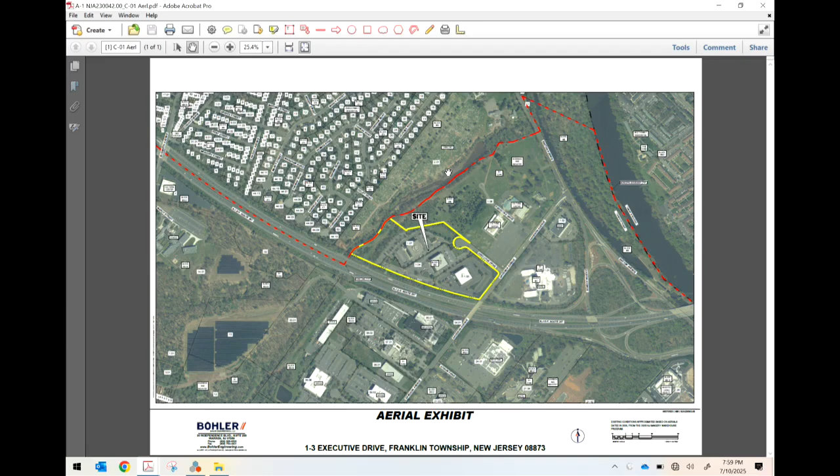As Mr. Conciatori had noted in his introduction, the site is identified on the tax map as block 469, lots 1.03, 1.04, 1.05, sorry, 1.07. I'm sure the board is familiar with the site, but just very quickly for edification, Davidson Avenue and the surrounding area. Davidson Avenue lies to the east of the site with a hotel use beyond. Executive Drive is currently to the north with a cultural center beyond. Interstate 287 is to the south with some industrial uses beyond. And there's a cemetery to the west with single-family residential beyond.

The site is approximately 18.33 acres. It's situated currently in the BI, Business and Industry Zone, where a warehouse is not a permitted use. And as Mr. Conciatori had mentioned in his opening, we understand the township's currently going through a re-examination of their master plan. There's an assessment on different intensity industrial uses, and this site would qualify in the proposed condition as a medium intensity industrial use. And with the vacation of Executive Drive, we would comply with all 10 of the conditions for that intensity industrial use.

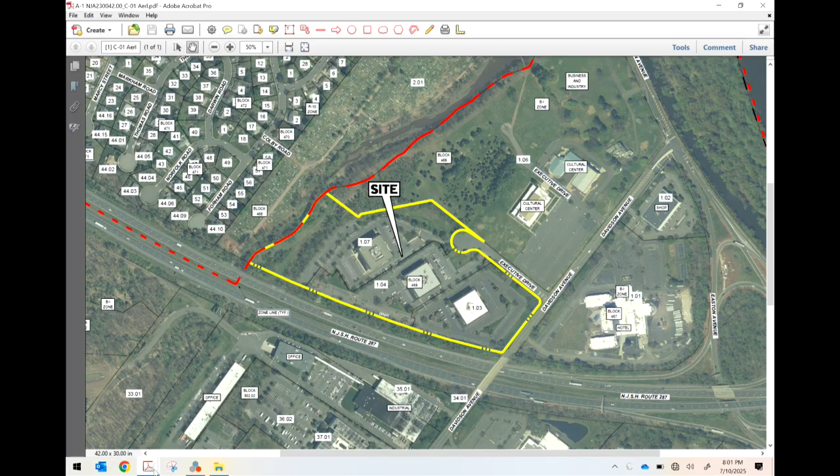So I'd like to bring up my second exhibit. We can mark this as Exhibit A2, and I'll zoom in a bit. This is a colorized version of the overall site plan sheet that was included with our submission package, sheet C301. And for the board, I'd like to go through the proposed conditions for the site. North is towards the top of the page for this exhibit, and it's dated July 10th, 2025, and again prepared by our office. The development proposes a 212,500 square foot warehouse with associated loading docks, driveways, car parking spaces, stormwater and utility infrastructure, landscaping, and lighting.

While we noted that the warehouse is not a permitted use in the zone, we are in front of this board seeking a use variance for the warehouse. From a parking perspective, we are proposing 152 car parking spaces for the site, which exceeds the minimum requirement of 93 spaces, and also exceeds the minimum requirement for the medium intensity light industrial pursuant to the master plan reexamination, which had a requirement of 119 spaces.

The parking will include 6 ADA accessible spaces, 2 of which would be van accessible per the code. And we also propose 7 electric vehicle parking spaces, which are located to the east and west sides of the car parking, which is located on the south side of the building. And the proposed EV parking and the number of those complies with the state statute as well. Within the EV parking spaces, there will also be 1 of the EV parking spaces as ADA accessible.

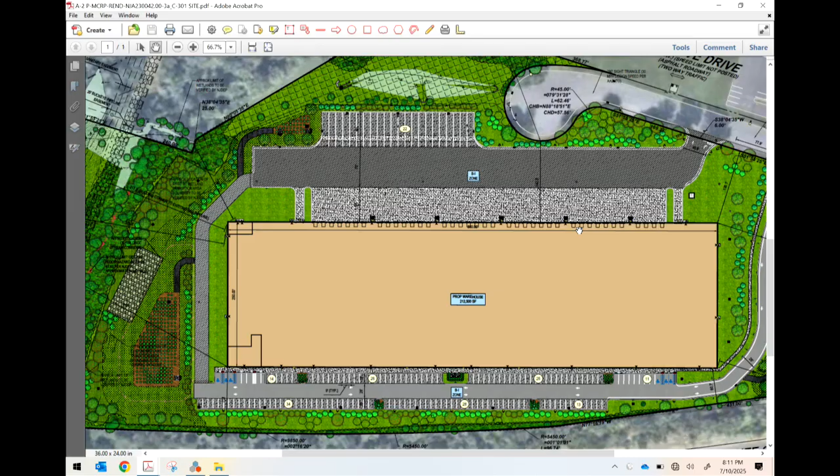There's also a code requirement for tree replacement for the trees on site that we are proposing to remove. The requirement calls for 295 trees to be replaced, and we are proposing a total of 441 trees to be replanted on site.

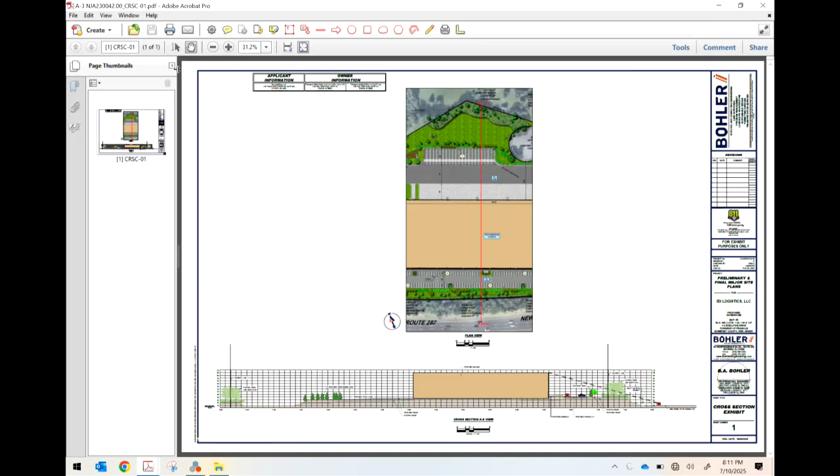Relative to screening for the site, I have a few other exhibits I'd just like to show to the board, because I think it's important for visibility for the board and to see how some of these views might look from the different areas surrounding. So I'll bring up this cross-section exhibit, and we'll mark that as Exhibit A3. This is also prepared by our office and is dated May 8th of 2025.

It's hard to see, but I'd like to zoom in on the bottom portion of this exhibit. This is more of a cross-sectional exhibit, a sightline exhibit to demonstrate what a car traveling westbound on I-287 may or may not see as they're driving by the site. So given the significant plus or minus 15-foot elevation change from 287 to the site and the existing landscaping that is already along the southern portion of the property, a car driving by will be pretty well screened from seeing the building by the existing landscaping and the grade change.

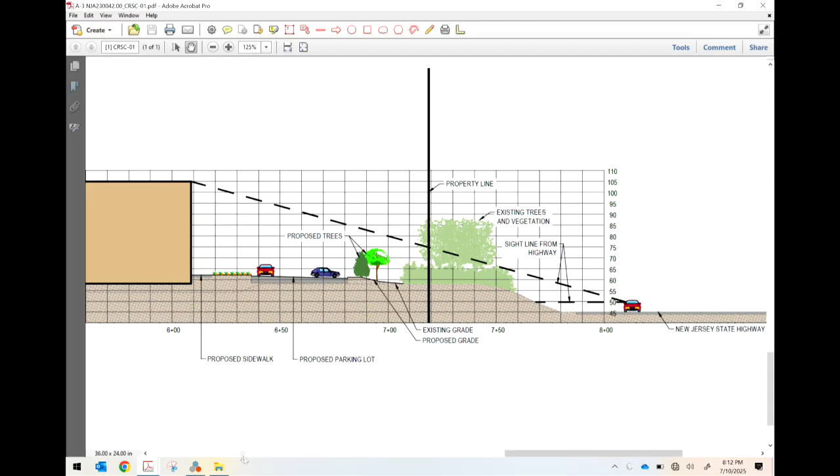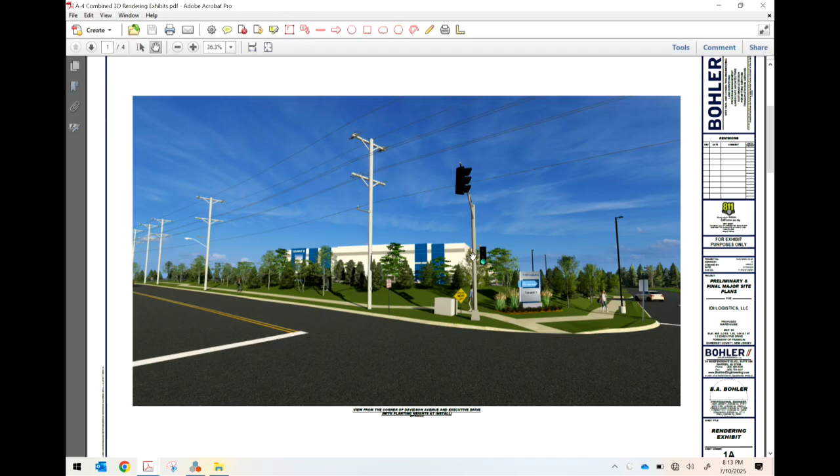And then lastly, we have a few 3D renderings as well that show some views from Davidson Avenue. This collection is 4 sheets. I'd like to mark this collection as Exhibit A4, and I'd like to just call this the 3D rendering exhibit package. So the first page of this exhibit is entitled "View from the corner of Davidson Avenue and Executive Drive with planting heights at install," and this is dated January 10th of 2025, prepared by our office. This shows the proposed plantings for the site at the time of installation for trees and screening for the building from the intersection of Executive Drive and Davidson Avenue.

And I'd like to go to the next page, which shows the plantings at a maturity height of between 5 and 10 years. So it's the same view, same intersection, same corner, but after between 5 and 10 years of growth and maturity, the trees provide a good screen and buffer to the proposed building and even the loading zone from that corner of Executive Drive and Davidson Avenue.

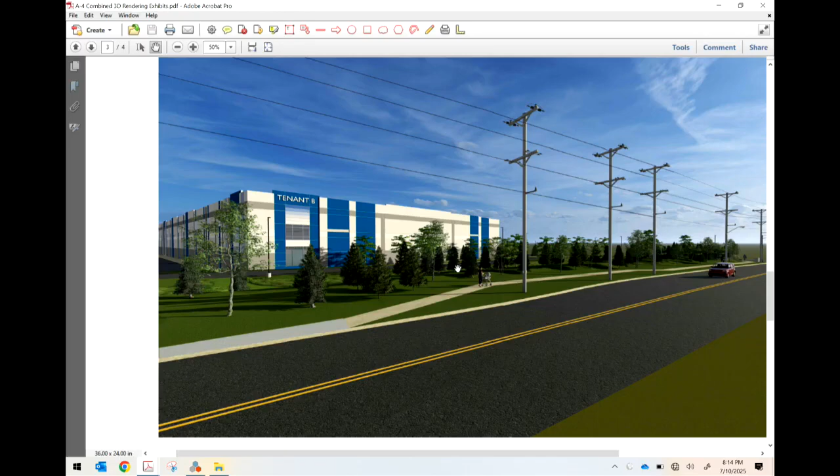And then on the next page, this is looking north from near the bridge coming over 287. This is looking north at the building. And again, this first picture here is showing the plants and the screening at the install height, so when they first get installed. And then similarly, I have the same view with the maturity height of the trees from between 5 and 10 years.

So hold on a second. How tall are the trees when they're planted with regard to the location on Executive Drive and what's the other, Davidson? Avenue? Davidson, yeah. Sure. So the install height of the trees is plus or minus 6 feet. It could be 6 to 8 feet. Okay. Relative to Davidson Avenue, I believe Davidson Avenue ranges from elevation, let's say 62 at the south side, to say 66 or 67 at the north side, and the finished floor of the building will be at elevation 62. So generally a very similar elevation, but once the trees are in and have a few years to grow and mature, for someone in a car driving by, they'll create a very nice buffer and screening from the building.

Okay, so Davidson is the east side, and then across the street from the warehouse is a hotel, is that correct? Correct. And will this screening help the hotel avoid a lot of extraneous movement and traffic from the warehouse? Will the trees that you're planning on planting? They'll block it, yes. From grade level at the hotel, with cars driving and circulating around the hotel, yes, it'll provide a good screen. And I believe the hotel does sit a little bit lower in elevation as well, which also helps. Okay. All right, thanks. Sure.

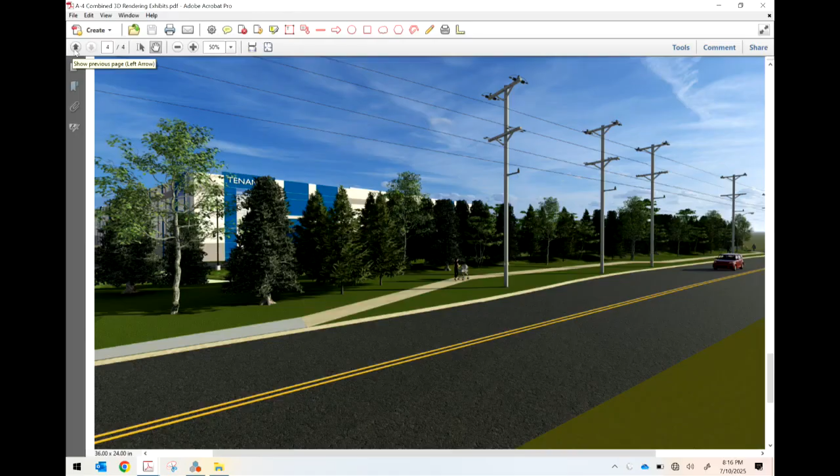I have just one question. If you can go back to the exhibit that's basically at the intersection. If you can just explain to the board, I believe that it's also showing, in addition to the landscaping, kind of a berm. Yes. Thank you, Mr. Healy. Yes, that also includes a berm along Davidson Avenue to provide extra elevation for the trees, to further help screen the building from along Davidson Avenue. It's a bit more pronounced at the intersection of Executive Drive and Davidson Avenue than it is on the south side of the site looking north. But yes, there's a proposed berm along the front of the property as well.

And that exhibit reflects the height accurately, consistent with the grading plan? That's correct, Mr. Healy. Thank you. How tall is the berm? The berm is about 4 or 5 feet, depending on where you are. Yeah.

And then I'll leave this up because I think it's a nice illustration, but just very quickly touching on some comment letters that we had received. Regarding the board engineer and the letter received from CME Associates dated June 16th of 2025, we have no objections to the comments in the letter. There is a note of a proposed disturbance within the I-287 right-of-way on the south side of the property, but there is no disturbance on the I-287 right-of-way.

We have a few trees near the property line that we are planning to remove, and graphically speaking, we show a limit of disturbance offset from the tree to kind of show that there is disturbance there, but the reality is there will not be any disturbance in the I-287 right-of-way. And just one other note from the engineer's letter that I thought was important is that I just wanted to confirm for the board that we can complete all the work on the property without disturbance to any of the flood hazard areas that have been verified by the DEP.

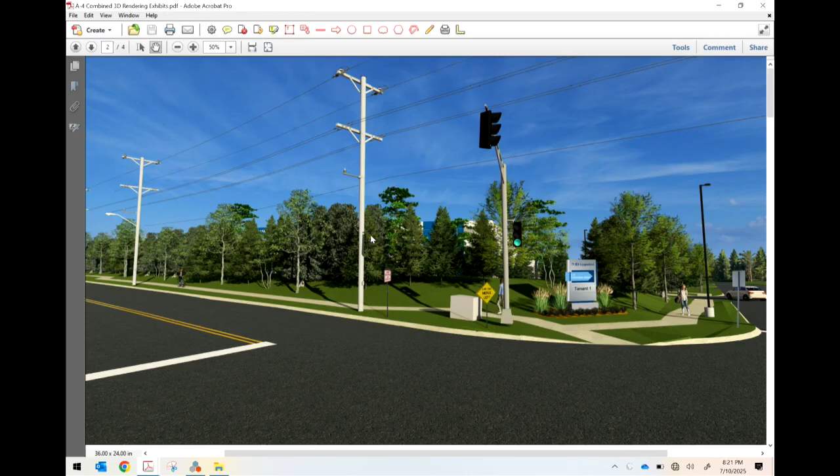For 287, or do you want to see the install height of the trees? No, I don't want to see the trees at all. I want to see the... there you go. This one? You have 22 semi-parking spaces up there, correct?

Correct. Is that for the tractor and the trailer, or just the trailer, or how? It's just for the trailer. It's just for the trailer? Correct. So there won't be any tractors parking there at all? They'll be there to drop the trailer, but they will not be parking there. They won't be parking there. Perfect.

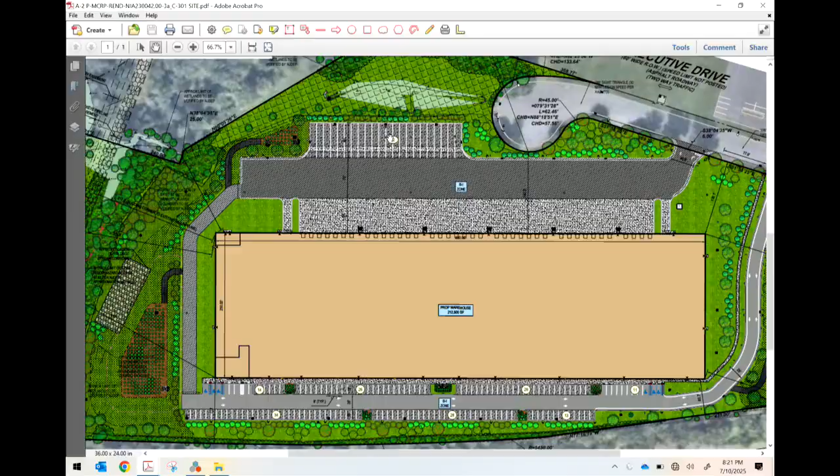What are you going to do with overflow, if there is any? From a parking perspective, that's not really a question for me from an operational perspective, unfortunately. Okay. All right. That's all I got. Thank you. Is there anything else that you need to comment on, or are you okay? That concludes my direct testimony, unless there's any other questions. I have no further questions for this witness.

Okay, then we'll again open to the public. Is there anyone who'd like to ask the engineer a question concerning his testimony? May I ask a question before we go to the public? Mark, what's the typical building height in other industrial zones within our township? Well, the height of warehouses, I think, varies. I think we typically see somewhere in the range of 44 feet to 50.

Okay, it was just being in this zone, it was 65, but I'm sure that was probably more indicative of the commercial aspect of the zone. Yeah, the zone permits office buildings as well. So I think that's where it comes from. But the zoning at the time this application was deemed complete... and actually, that's not true.

I'd have to look at the ordinance, but I know if you go above 50 feet, then the setbacks change and the buffering changes. So I think the testimony is that they're going to comply with the 50. Correct. And they're going to demonstrate that. Okay, perfect. Thank you. All right, again, if there's anyone in the public who'd like to ask a question, seeing none, we'll close. Next witness. Betsy Dolan, please.

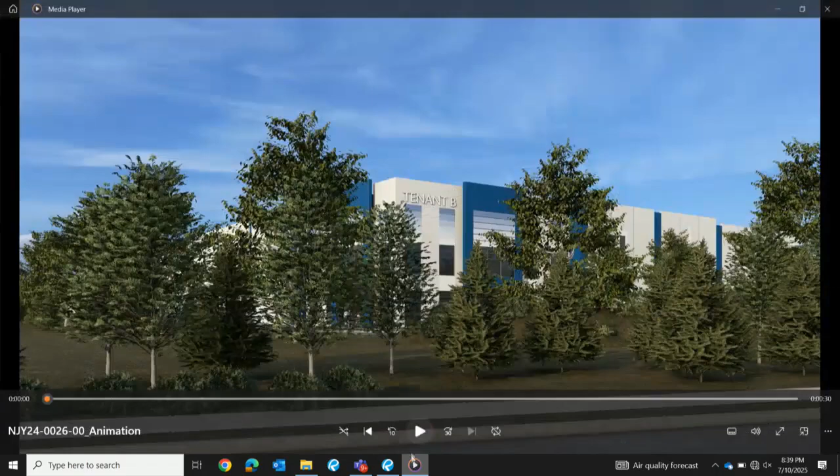And then from here, I could show a quick video going through the site. So this is a view, we're driving starting on Davidson Avenue. Obviously driving within the speed limit. So this is on Davidson. Obviously then we're going to slow down to enter Executive Drive. So pull into Executive, and then ultimately we'll turn into the site itself.

So I really just wanted to highlight the changes made to the aesthetics of the building, but I could go through the plans and elevations in greater detail if need be. I think there was a question in one of the comment letters about screening of the roof equipment and things. Yeah, as you can see here, given the height of the building, the scale, any roof equipment will not be visible at eye level because it'll be pushed away from the parapet. Thank you. Those are the questions I have for this witness.

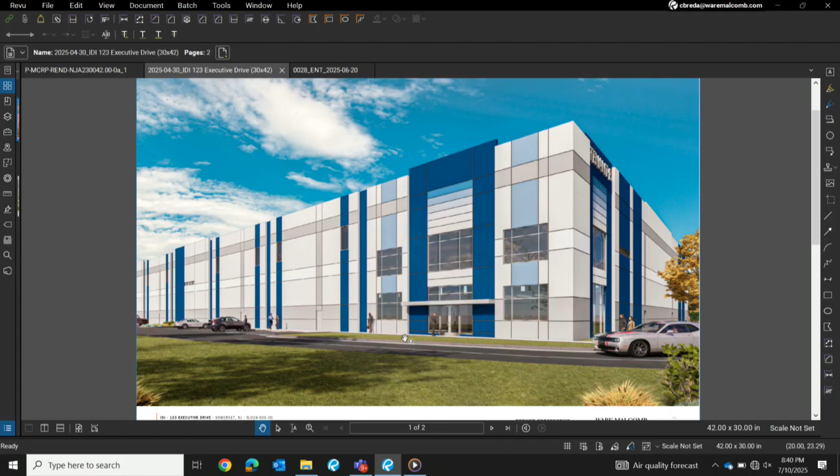Anything from the board? And we'll open again to the public if anyone has a question for the architect. Okay, we'll close. I had one quick question, sorry. Go ahead. It popped into my head after you brought it to the public. We're still closed to the public. What's the clear space internally? 40 feet. Thank you. Anything else? Oh, okay. Thank you.

So I'll call my last witness, which is Paul Grygiel, who is the planner for the project. Mr. Grygiel, if you can raise your right hand. Do you swear or affirm that the testimony you're about to give before this board is the truth, the whole truth, and nothing but the truth? I do. Just repeat your name and spell your last name for the record, please. Yes, good evening. It's Paul Grygiel, G-R-Y-G-I-E-L. And I apologize, but just quick housekeeping on the exhibits. The video is A6. Okay, that's fine. Just wanted to make sure we're on the same page. Thank you.

Mr. Grygiel, if you can provide the board with a summary of your analysis and conclusions in regards to, obviously primarily, the D1 use variance, as well as the several C variances, including, even though we know that they will become moot with the vacation of the street, the two variances related to Executive Drive frontage. Sure, I'd be happy to.